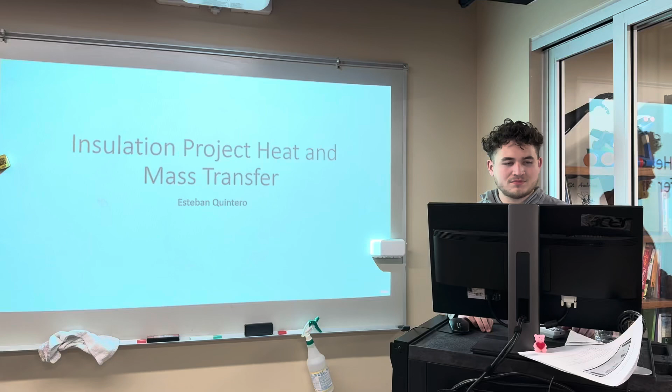Alright, I'm Esteban Quintero, and this is my insulation project for heat and mass transfer.

First I'm going to give a background on energy insecurity. Energy insecurity is a multidimensional construct that describes the interplay between physical conditions in housing, household energy expenses, and energy-related coping strategies, as quoted by Hernandez. There are plenty of adverse effects such as financial strain, uncomfortable living conditions, increased resource usage, and health concerns during harsh weather conditions. These can all result from energy insecurity.

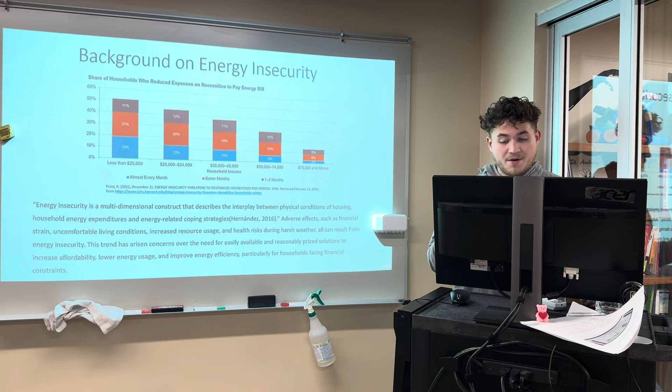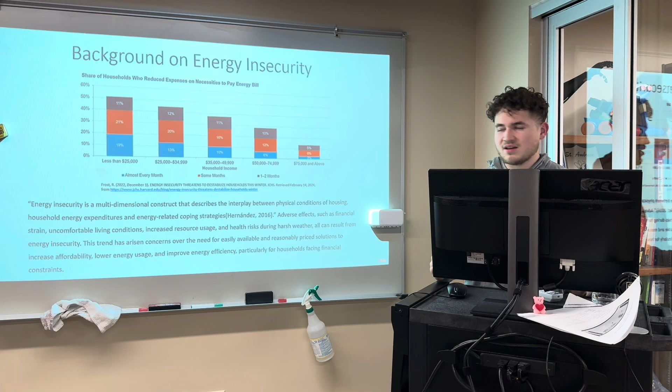This trend has arisen over concerns for the need for easily available and reasonably priced solutions to increase affordability, lower energy usage, and improve energy efficiency, particularly for households facing financial constraints. We've seen the importance of this for households facing financial constraints.

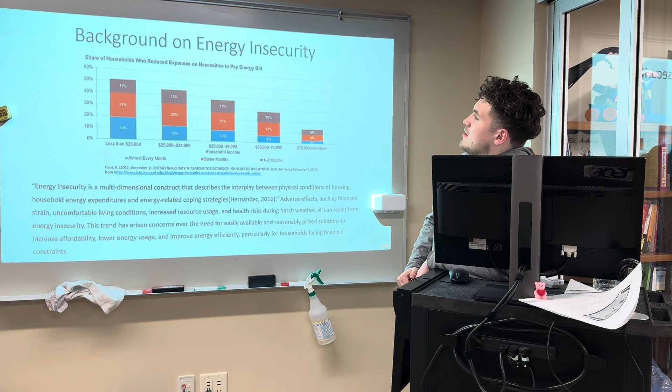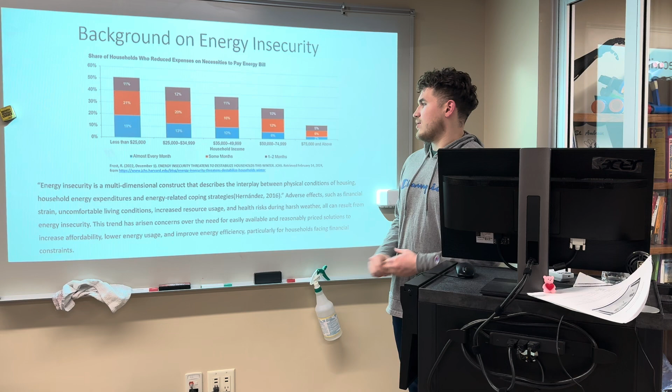If we look at this data pulled by Harvard data analyst Frost, households that range within the income of $25,000 had to reduce expenses on necessities to pay energy bills. That's roughly 51%, just a little over half, which is quite concerning. Even within the $35,000 range, it's still roughly in the 40 to 50% range.

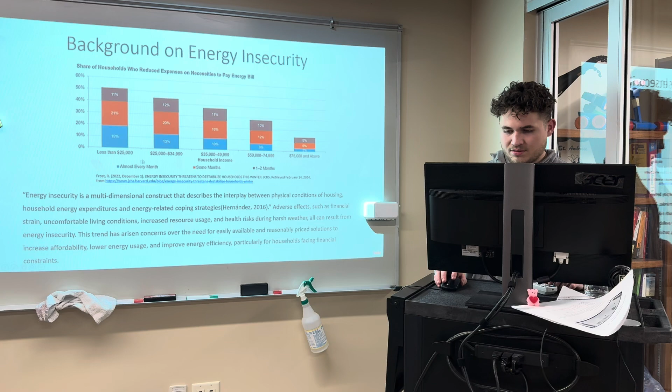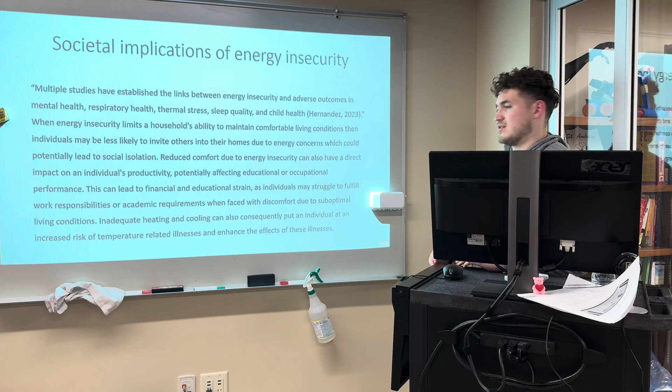So the societal implications of energy insecurity: multiple studies have established links between energy insecurity and adverse outcomes with mental health, respiratory health, stress, sleep quality, and child health. This is quoted by Hernandez again in a separate article.

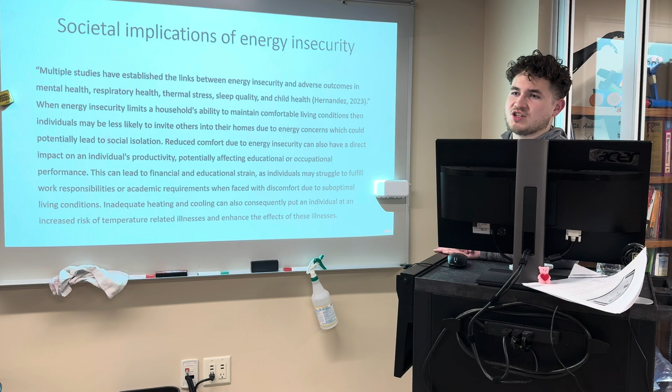When energy insecurity limits a household's ability to maintain comfortable living conditions, it can have a butterfly effect, a string of multiple adverse effects. It could potentially lead to social isolation—you may not want to invite family and friends over if your house is uncomfortable, too hot or too cold.

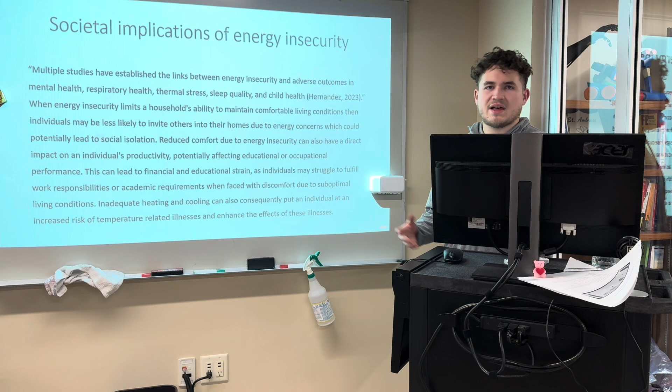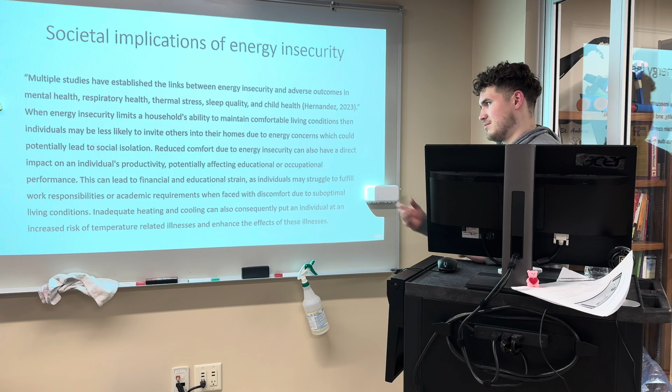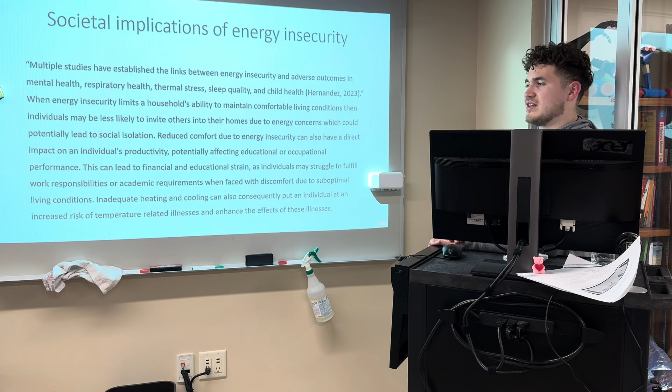It could also have an impact on productivity and comfortability, especially if you're working from home. That could lead to adverse effects in educational and occupational performance, which of course lead to financial strain, and then a plethora of additional issues, all stemming from discomfort due to suboptimal living conditions. Inadequate heating and cooling can also put an individual at increased risk of temperature-related illnesses and enhance the effects of these illnesses.

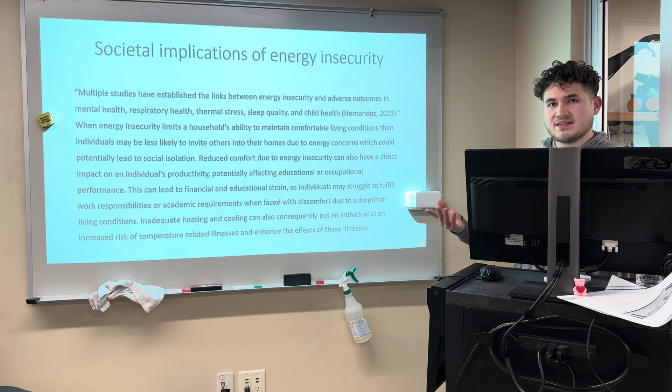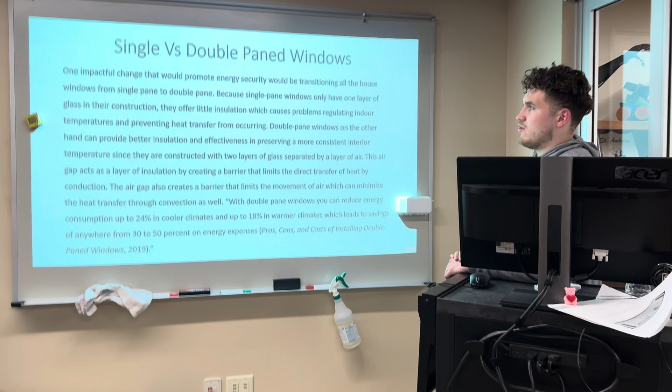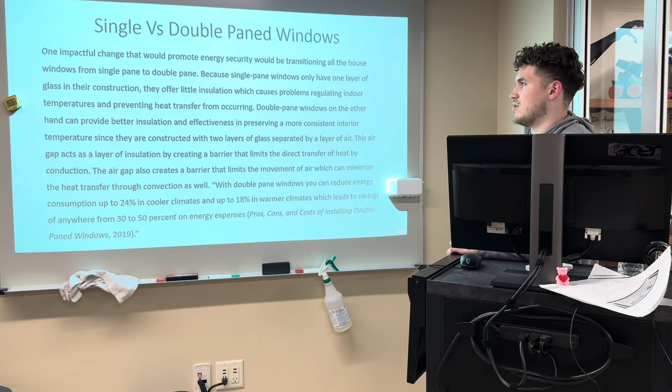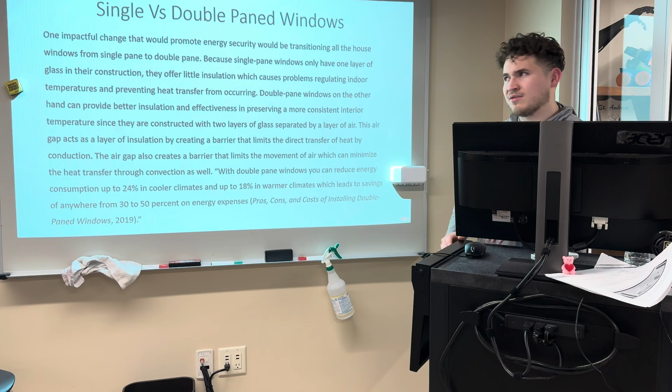Now we're going to discuss single versus double pane windows. This is an impactful change that could be made to promote energy security. Single pane windows only have one layer of glass in their construction, which leaves very little insulation. This causes problems regulating indoor temperatures—there may be drafts in your house, uneven heating, and so on.

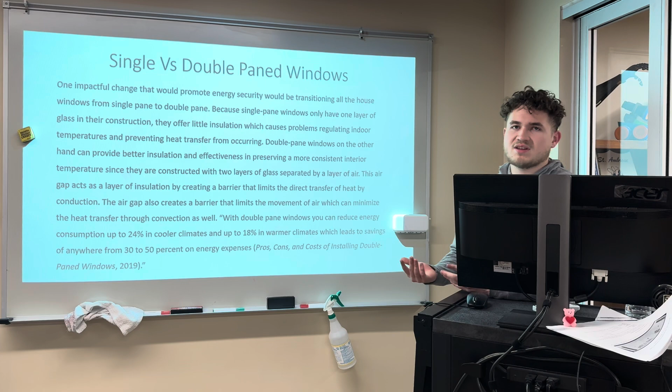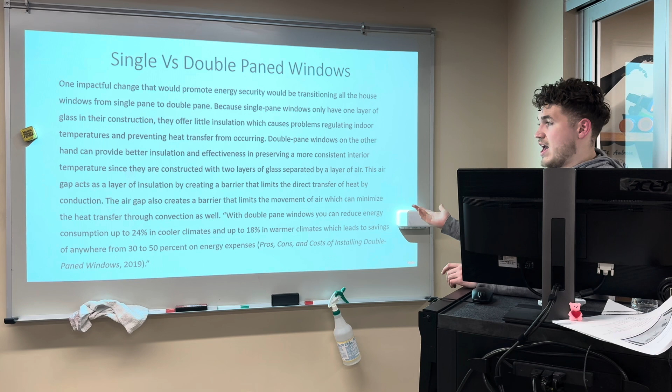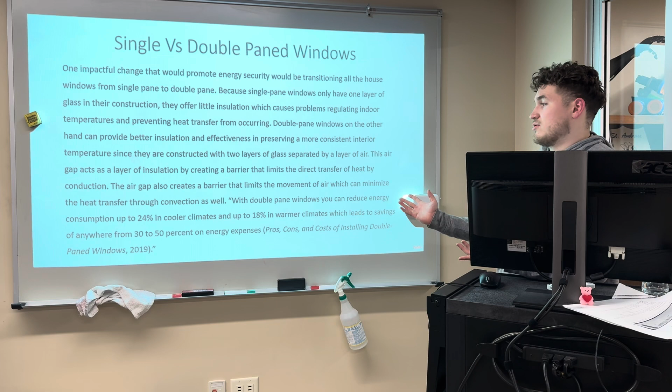Double pane windows, on the other hand, provide better insulation and effectiveness in preserving a more consistent interior temperature, because they have two layers of glass with an insulating air gap in between. This air gap acts as a layer of insulation by creating a barrier that limits the direct transfer of heat via conduction. It also creates a barrier that limits the movement of air, which can minimize heat transfer through convection.

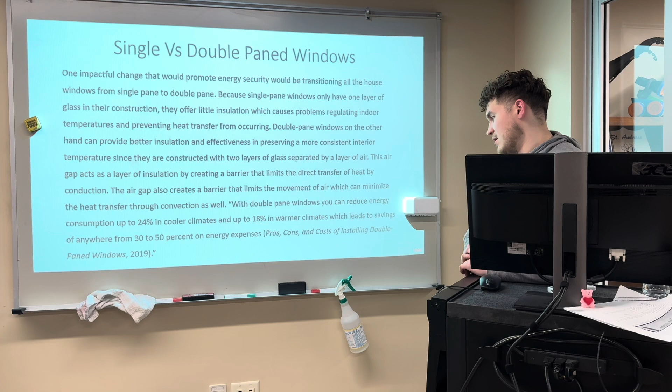With double pane windows, you can reduce energy consumption up to 24% in cold climates and 18% in warm climates. This also leads to savings of 30 to 50% in energy expenses. This is from Pros and Cons of Double Pane Windows.

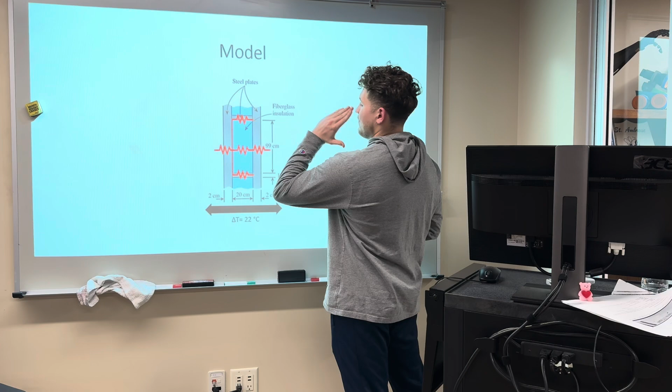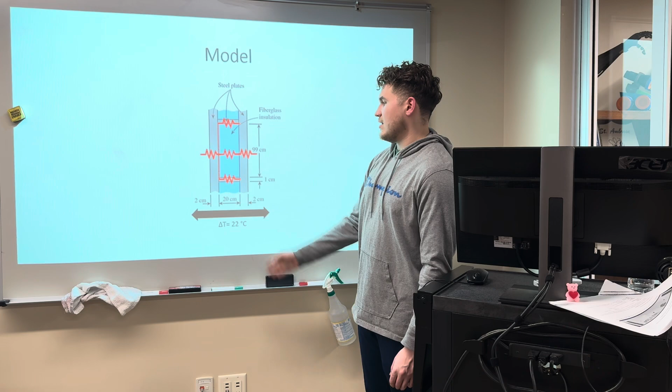So this is our model of the problem. You could essentially model this as a double pane window—a glass pane, an air gap of insulation, and another glass pane—except here it's steel plates and fiberglass. These are the conductivities across, with conduction in parallel with the steel bar and the fiberglass insulation, and a temperature difference from each side of 22 degrees Celsius.

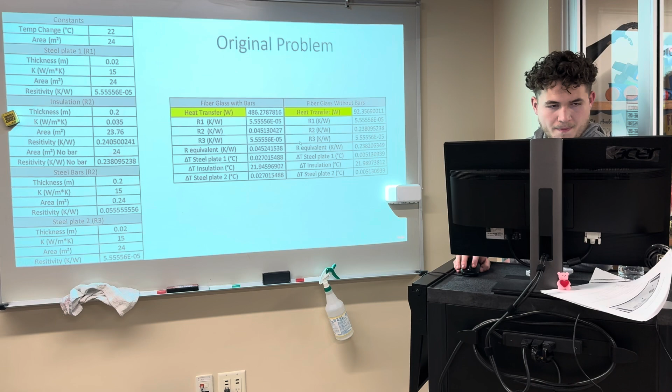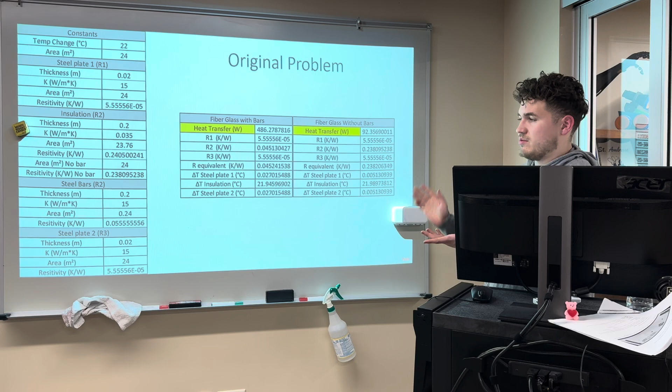This is the finite and original problem. We have our steel plates, and that's all the parameters we input into the equation to solve resistivity. Then we have the insulation and steel bars that go into our resistance two, combined in parallel. Then we have our steel plate two, the final one, with the same parameters and resistivity as the first. With the metal bars in parallel, we can see we have a heat transfer of 486 watts.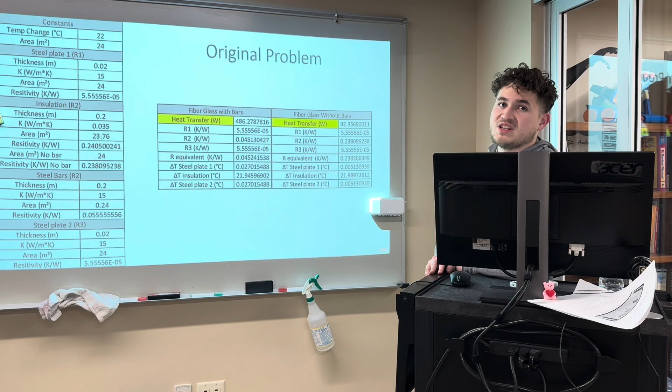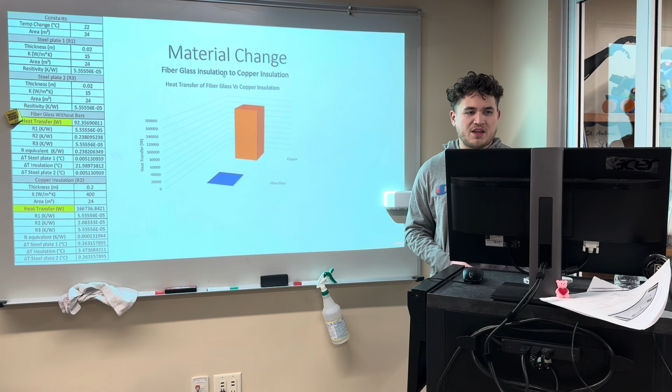So first we're going to go with our first parameter change: the material change. I decided to go with a very extreme material change, using one of the most conductive materials versus one of the least conductive materials. I decided to go with copper insulation.

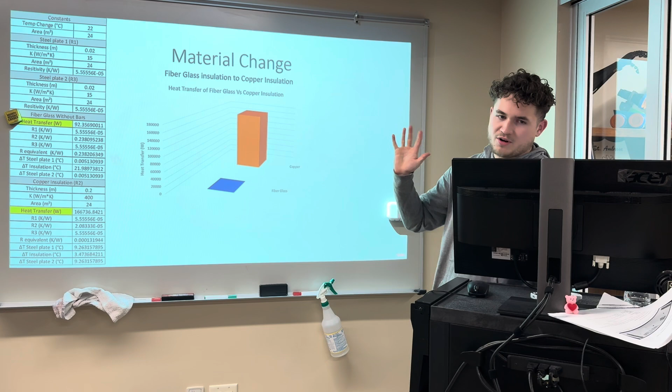This copper insulation was calculated the same way as the fiberglass without the bars—assuming the entire void space does not consist of any steel bars going across the cross section, just copper. Same thing with the fiberglass. So I have those same results there: our steel plate, and then the fiberglass without the bar.

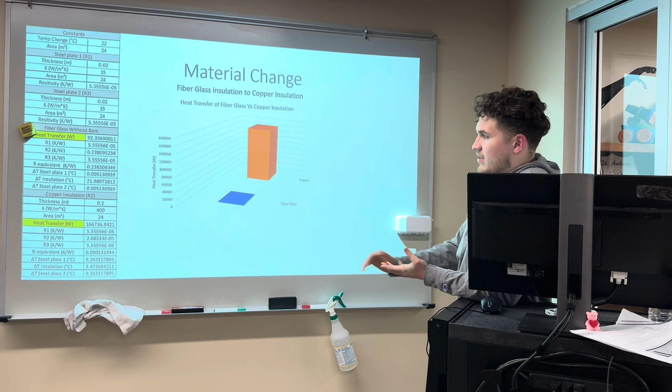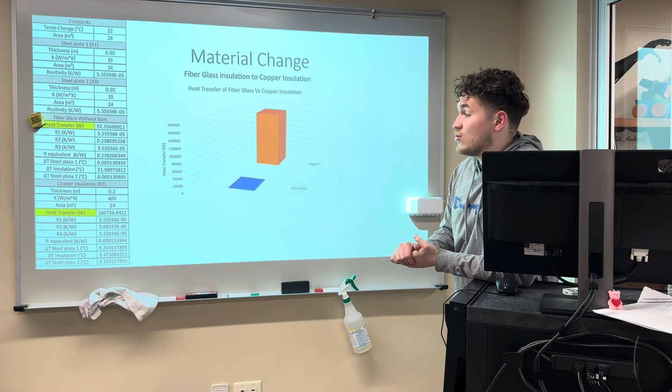When we calculate that heat transfer, we end up with 92 watts, as discussed in the previous slide. But as you can see with our copper insulation, we have a heat transfer rate of 166,736 watts, which are obviously two very big extremes.

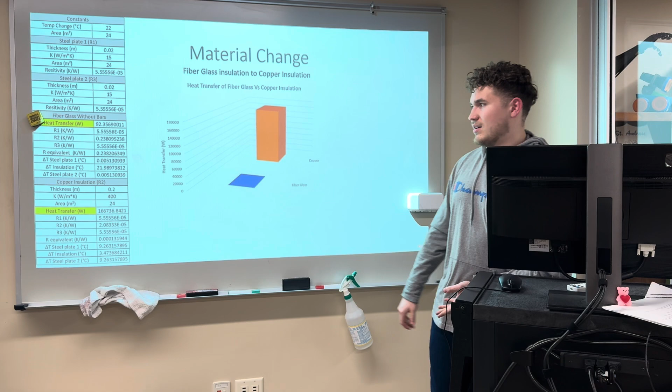As you can see here, I graphed it on a 3D graph. When I tried to graph it 2D, you couldn't even see the results of the fiberglass, so 3D at least shows that there is something there. And there's a massive difference between a heat transfer rate of 92 watts versus 166,000.

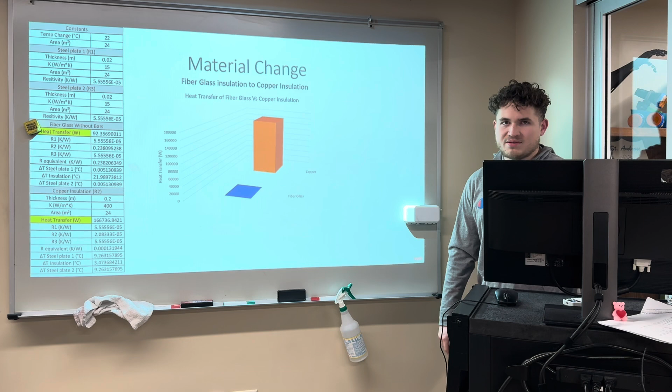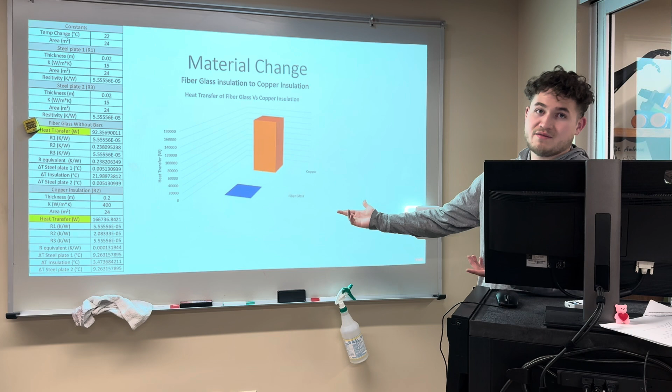So that's why we use copper within our wiring and a bunch of other things like heating coils. That's why we use that material versus fiberglass as insulation to stop heat transfer. So that K value is very important.

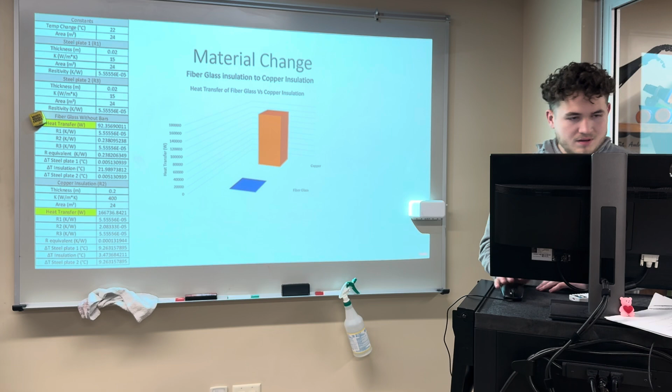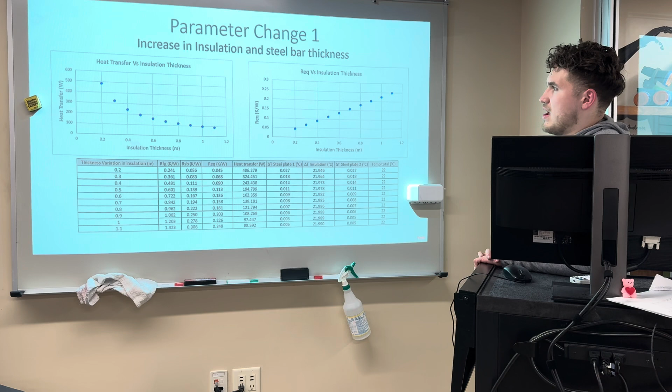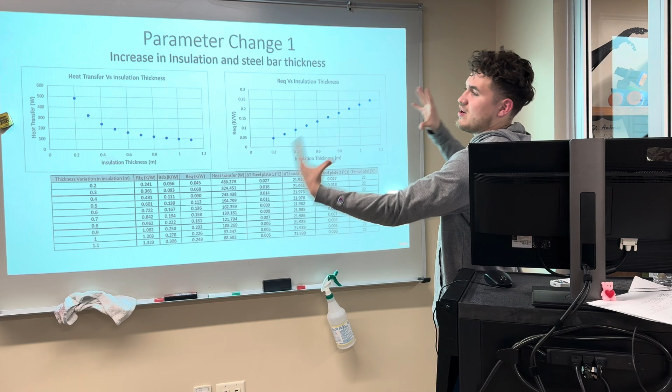So parameter change 1. This is the first actual parameter change that isn't the material. What I did is I increased the insulation and steel bar thickness. So essentially I increased the distance between steel plate 1 and steel plate 2, and assumed that the material essentially filled that additional void space. So here are the results.

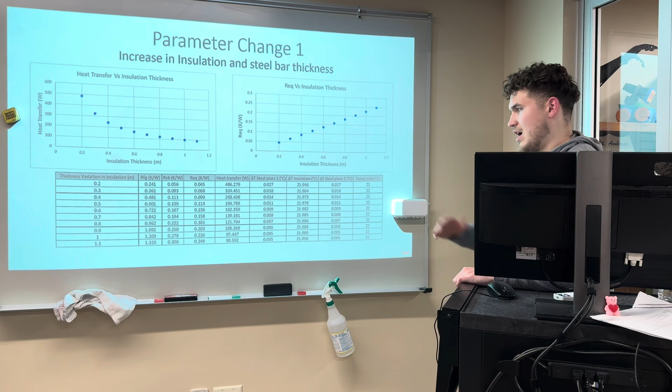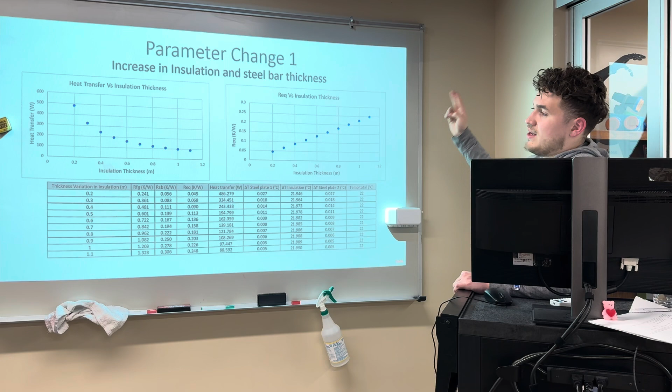As we increase the thickness of our insulation, we see an exponentially decaying trend line with the heat transfer, which means our heat transfer is decreasing at an exponential rate, which is very good if we're trying to reduce heat transfer. And our equivalent resistance increases linearly as the thickness increases, while the heat transfer is decreasing exponentially in a decaying fashion.

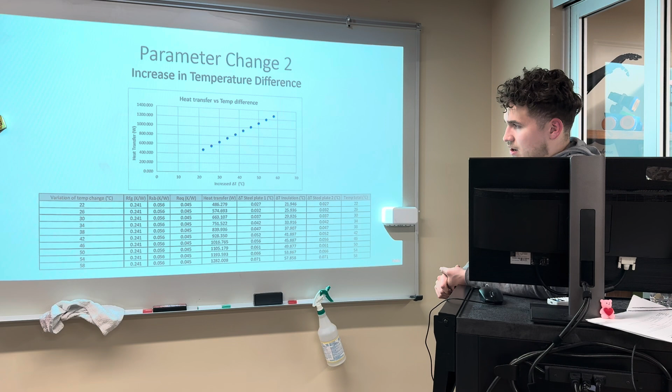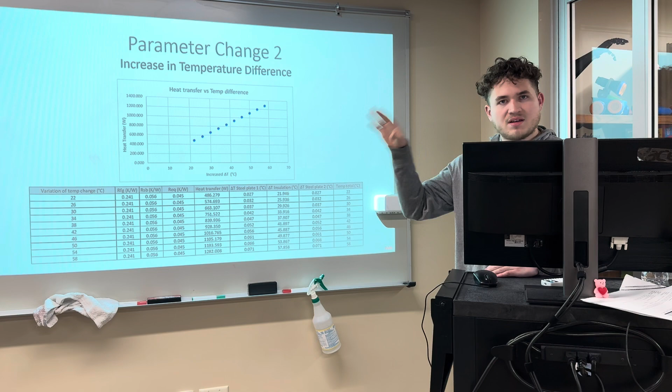Then we have parameter change 2. I increased our delta T, so I changed the temperature difference between the two sides in increments of 4. Based off our results, our heat transfer increases linearly as our temperature variation changes. So this really shows, during those extreme winter months, how important it is to have insulation in your home, because that heat is going to be leaving into that cool environment at a much faster rate.

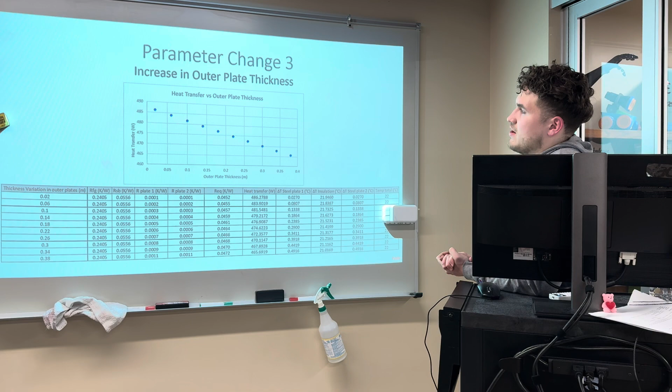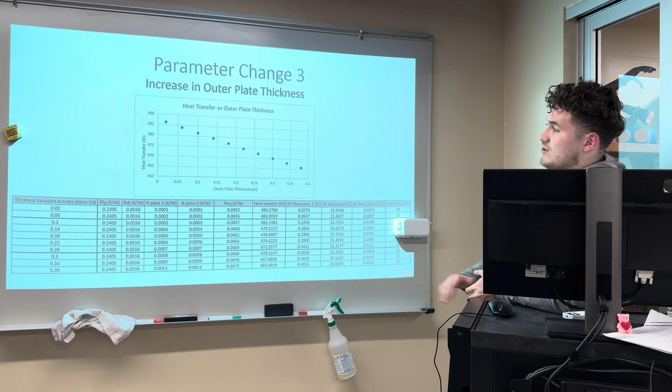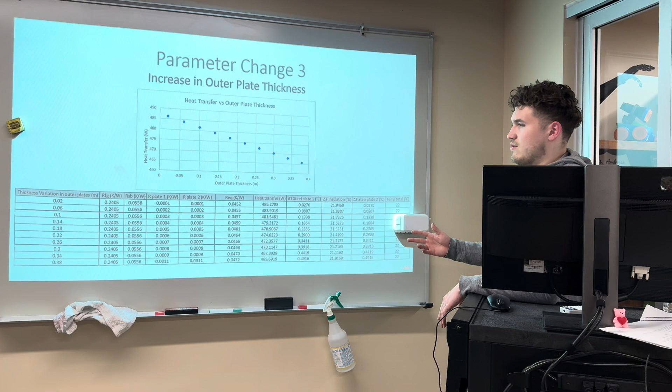For this third parameter change, I increased the outer plate thickness. Here's our model. I increased the thickness on both outer plates by the same increments. As we increase the thickness of our metal plates, we do decrease heat transfer, but not by a significant amount. We go from only 486 watts to only 465 watts, a difference of roughly 20, as opposed to the exponential decaying trend line that went from 486 to roughly the 70, 80 range.

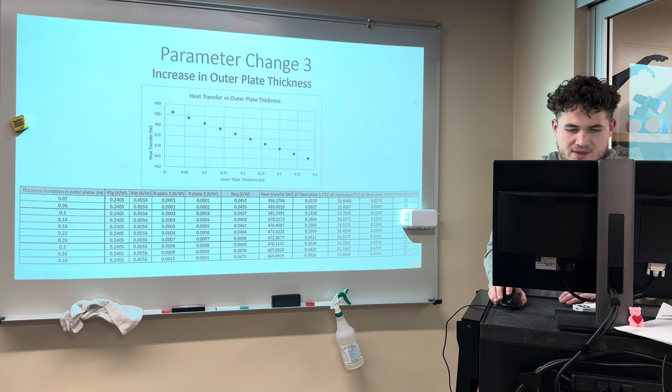So we see that linearly decaying trend line as the outer plate thickness increases. We also can see that our delta T for these steel plates increases too as they take on more heat, but not a significant amount.

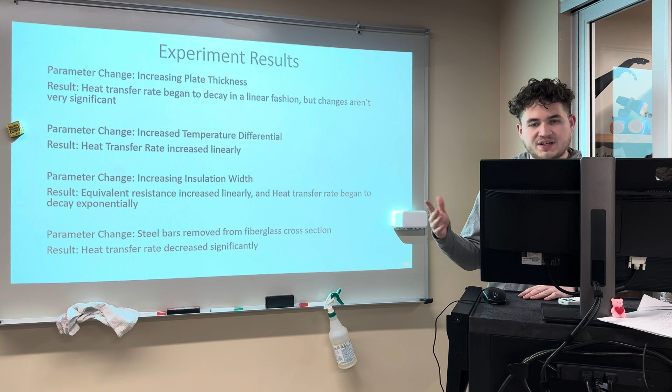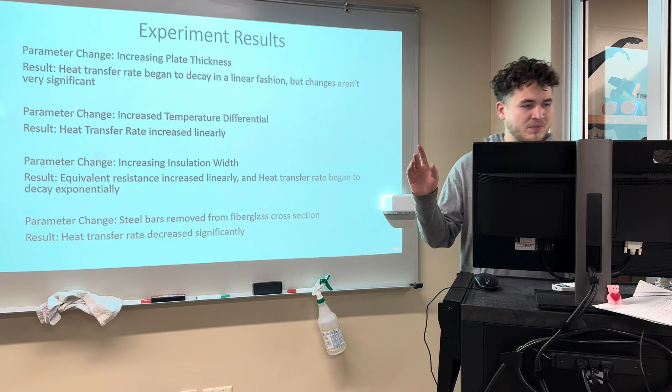So here are the experiment results. Parameter change, increasing the plate thickness: we saw the linear decay, but not very significant changes, so it probably isn't a very good idea if you're trying to reduce heat transfer. Parameter change with increasing the temperature differential: heat transfer rate increased linearly.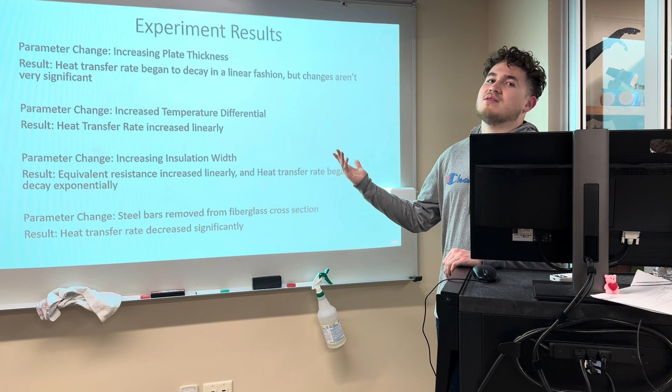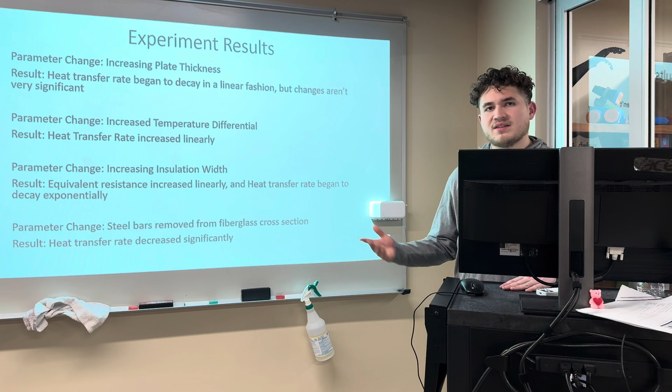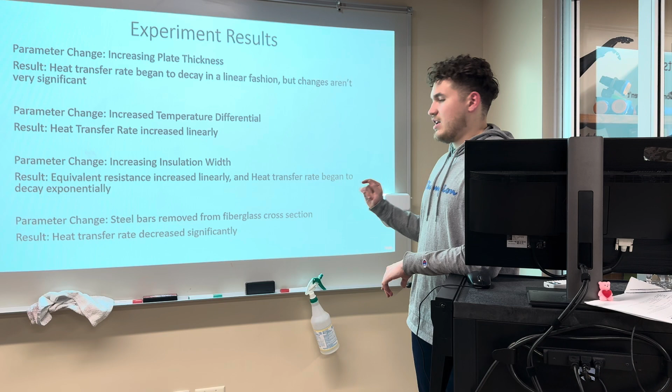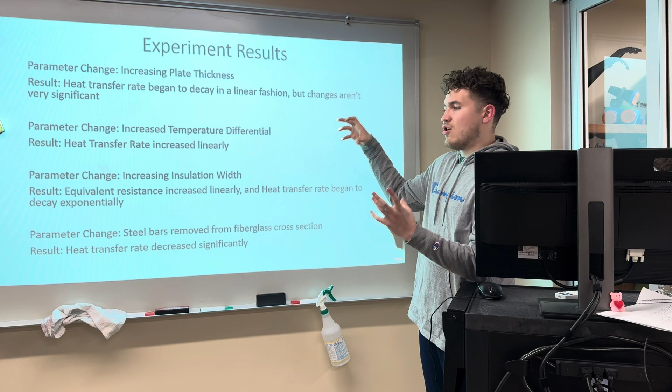Parameter change with increasing the width of the insulation area, which included the steel bars: the equivalent resistance increased linearly, and the heat transfer rate decayed exponentially. And then the parameter change with the steel bars removed from the fiberglass cross section: we compared the heat transfer rate with the steel bars present and without them, with just insulation engulfing the entire void space. The heat transfer rate, of course, decreased significantly.

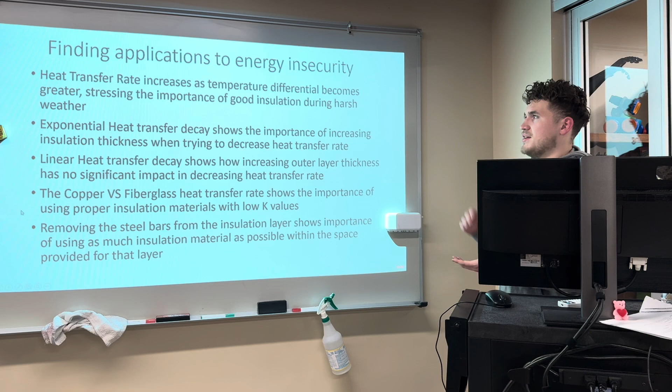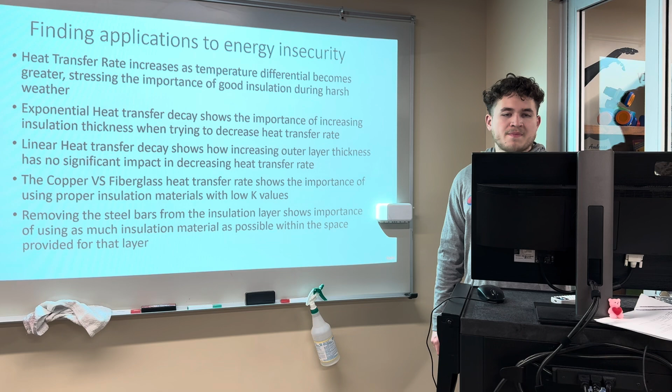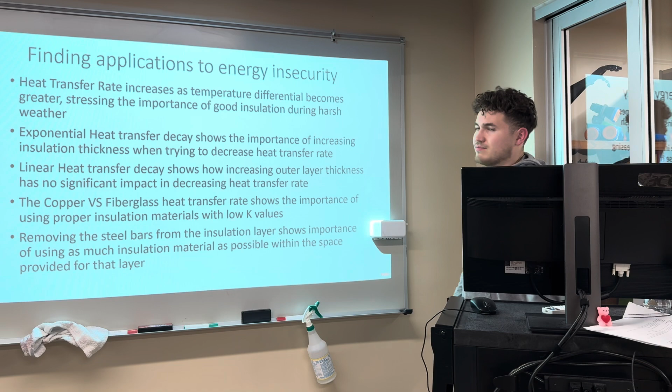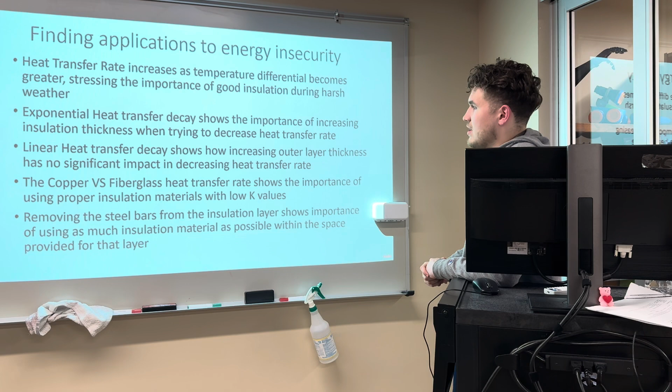So this is how our findings can be applied to help with energy insecurity. With heat transfer increasing as the temperature differential becomes greater, that shows the importance of good insulation in harsh weather months, and things like double pane windows, which will save significant money in more extreme environments. The exponential heat transfer decay shows the importance of having the right thickness of insulation when insulating your house. That's the most important factor in decreasing heat transfer rate, as you saw experimentally.

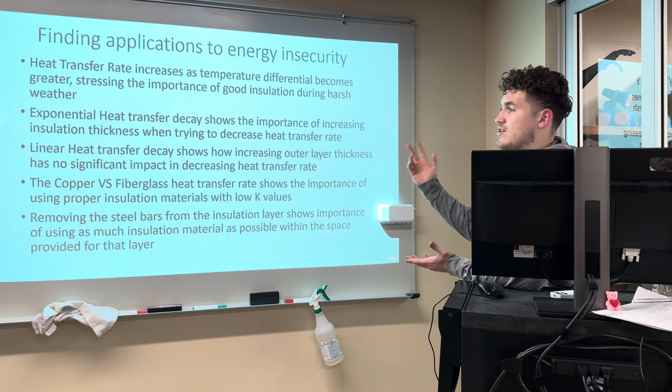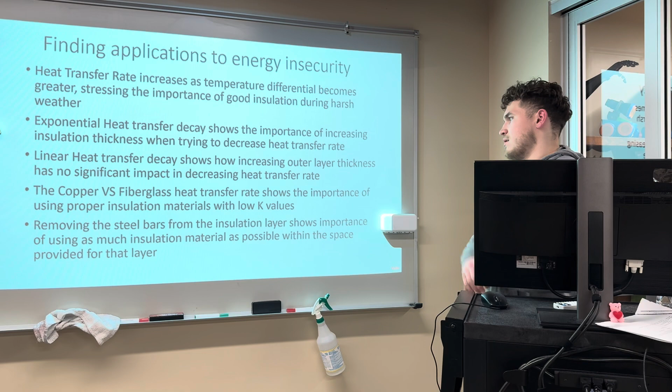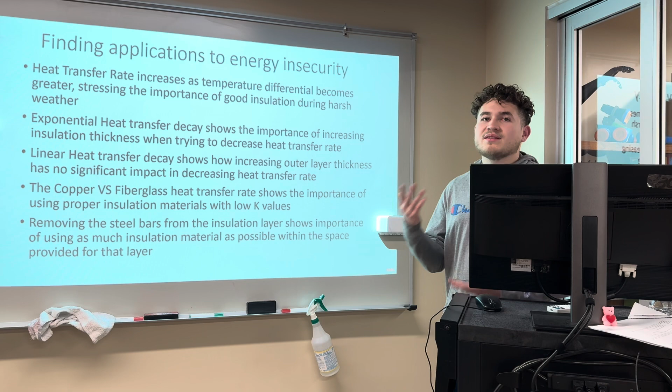The linear heat transfer decay from the outer layer thickness shows that it doesn't have a significant impact and shouldn't be considered a solution for decreasing heat transfer. And copper versus fiberglass shows how important it is to select the right insulation material. That K value, the conductivity, is a very big factor.

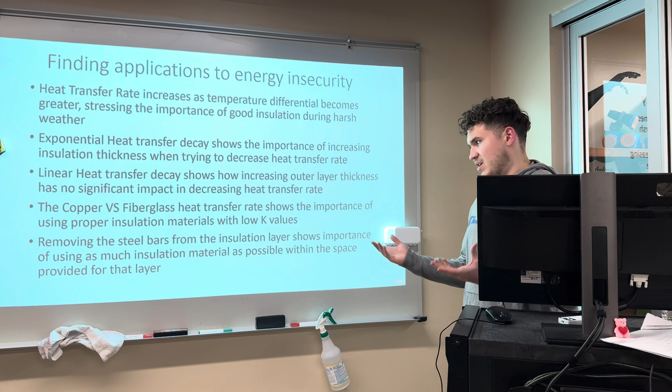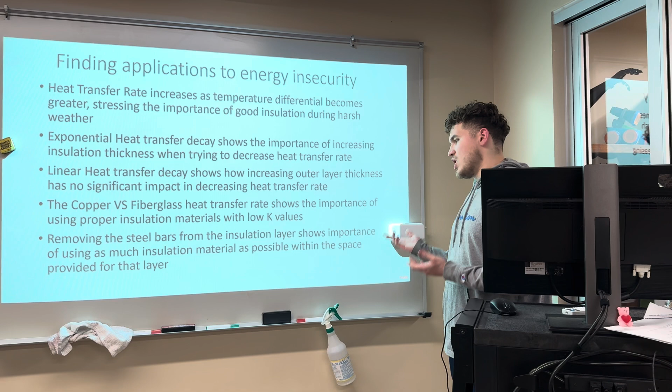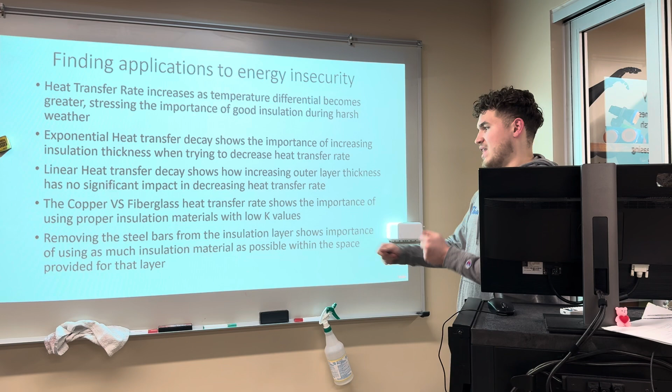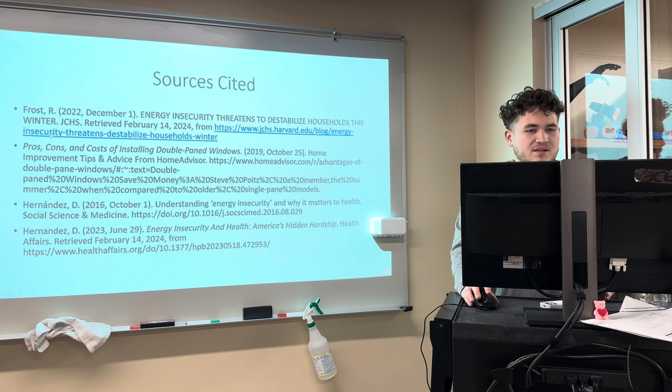And removing the steel bars from the insulation layer shows the importance of using as much insulation material as possible within that void space. So if you want an insulating layer, make sure it's all insulation and nothing else. That's how you make sure you have the most efficient insulation between two boundaries. And that concludes my insulation project.